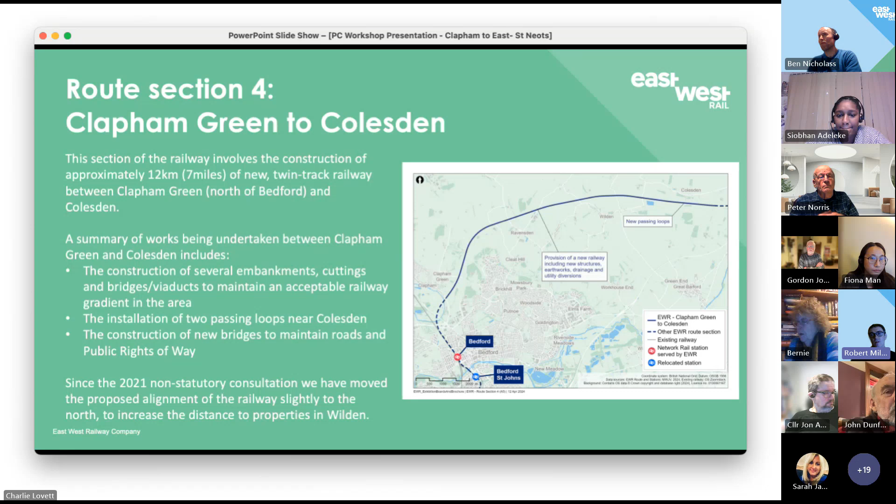So can we go to the next section, please, Sarah? Thanks. The next section we go into is Roxton to east of St Neots. In this section we are presenting 2 potential alignment options for the Tempsford alignment and the Tempsford station itself. There is alignment 1B, which deviates just after the Colesden area to go south of the Black Cat roundabout, crossing over the amended existing A421, the A1, River Great Ouse, East Coast Main Line, and back over to the new A421 dual carriageway. This alignment is quite similar to the route update announcement alignment we put forward in 2023.

An alternative to this has also been proposed at the consultation. We've been asking for views on both of these alignments. That's alignment 1C, which runs north of the Black Cat Junction. We cross over the A1 just north of the junction, River Great Ouse, and the East Coast Main Line.

Then we hug the north and west sides of the A421 through the area. The station designs at Tempsford are on a similar basis for both alignments, i.e. the East West Rail platforms are on viaducts above the East Coast Main Line, with a passenger interchange allowing people to access 2 platforms on the slow lines of the East Coast Main Line.

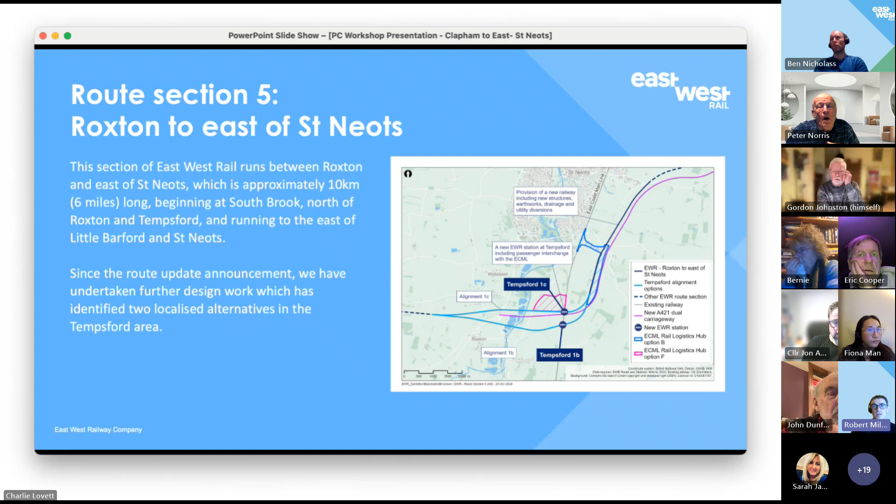We'll only be taking one of these options forward, and that's partially dependent on which alignment is chosen as preferred, as well as some further work that's underway. So we've expressed no preference between alignments 1B and 1C, and there's a question in the consultation document asking for people's views on those two.

Once we get just north of the existing A421, the routes are effectively the same as they head north along the eastern side of St Neots, and then we cross underneath Cambridge Road east of St Neots Wintringham Development before moving into the next section.

Much of this section east of St Neots is in cuttings as the hillside rises quite rapidly, though we are in short embankment and bridge sections to cross over Hen Brook and Foxbrook in that area.

I think probably the other point to note is alignment 1B is much higher than 1C. Alignment 1B at Tempsford Station itself is 22 metres above ground level, and 1C is 9 metres above ground level at that point, though it does need to be slightly higher to the west from there.

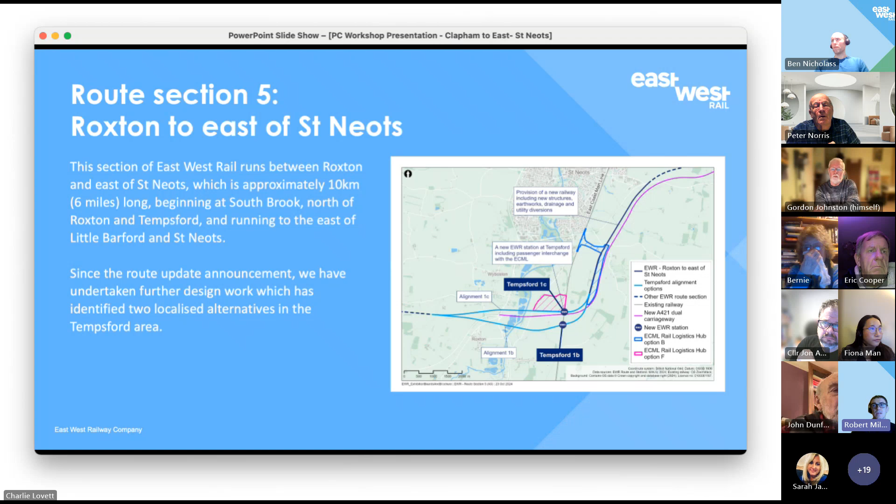I think that covers the area, Sarah. So, yeah, I'll pass to Fiona. Yeah, thanks. Yep, thanks, Rob.

I've got 2 slides on our approach to the environment on East West Rail, and then I'll talk a bit about our key environmental constraints and mitigation.

Protecting the environment is an important part of our decision making when we're developing our proposals. As part of the environmental mitigation hierarchy, we take a proactive approach to avoid, reduce or compensate for potential negative environmental impacts as a result of our scheme.

Since the 2021 non-statutory consultation, we have published our environmental sustainability strategy, which is available on our East West Rail website. This contains 6 environmental sustainability pillars, each with an associated ambition and definition. These pillars consist of natural environment, carbon, climate resilience, historic environment and landscape, circular economy, which is about minimizing waste and promoting material reuse, and finally, people and community.

Next slide, please, Charlie. Thank you.

As part of this non-statutory consultation, the likely environmental impacts of our proposals and the mitigations are described within our environmental update report. This report is available as a PDF and also as a digital interactive version on our website. For this section between Clapham Green and St Neots, you can find the information in chapters 8 and 9. As Siobhan mentioned earlier, our environmental mitigation proposals are in the plans and profile drawings, available on our website, and we also have some environmental fact sheets there too.

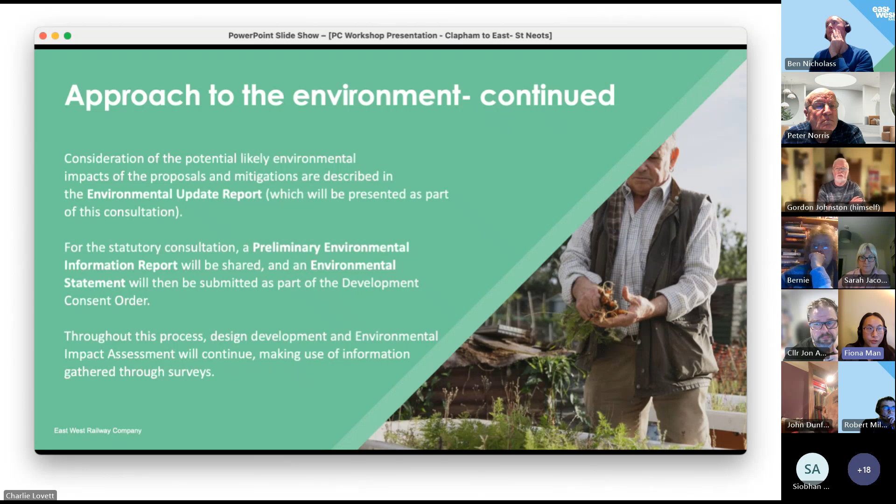Okay. Oh, sorry, Justin. Justin. You're on mute, Justin.

Just a quick one on the environmental impact assessment. No need to answer it now, but if you could answer it in the notes from this meeting. Could you just set out the headings of the 6 areas that you look at? And can you also set out the hierarchy that those areas are given in your assessment? Can you just outline them in the minutes from this meeting, and then what hierarchy they're given in terms of importance?

I can. So our scoping report is available publicly on the Planning Inspectorate's website. That will set out the topics we will cover within our environmental statement, so I can send that across to you. In terms of the hierarchy, I would need to get back to you on that one, but it would be a fine balance because obviously it's people, biodiversity - you have to balance those impacts.

I understand that. That's why I asked the question, and I didn't expect an answer to it tonight. But if we can have an answer in the minutes from the meeting, that'd be great. Thank you.

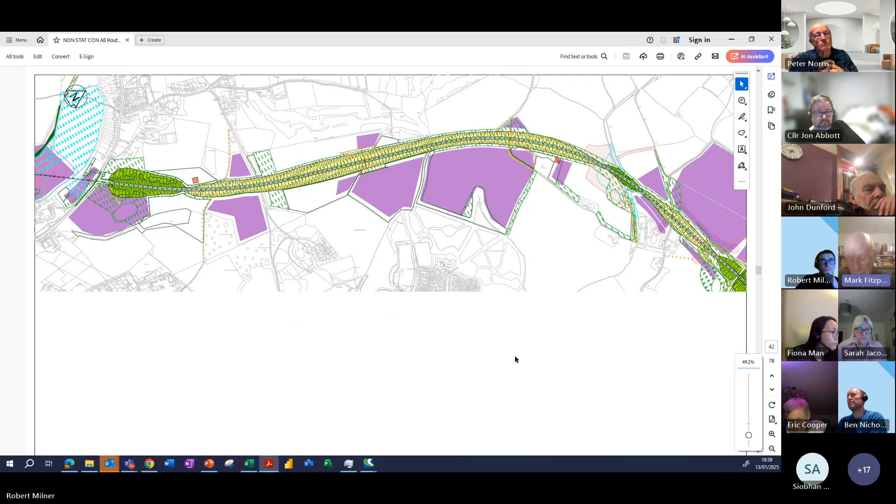I note that you're closing one footpath within Clapham, suggesting diverting via two other footpaths - Footpath Carriage Drive, Clapham 24 - we have suggested previously should be a bridleway. We've got two other bridleways, one in Clapham, one in Brickhill, that are within 400 metres of each other and don't connect. They would join around where you've got this proposed bridge, where Clapham footpaths 5 and 6 join. There's one bridleway on the Brickhill side, one on the Clapham side, 400 metres apart, but not connecting.

So we've got some historic weird things within the public rights of way network. It'd be amazingly good to try and improve on what we've got, to give the public a benefit from what is happening here. I'm fundamentally interested in what's the approach you're taking - is it simply to maintain, or is it to try and improve?

Thanks. I've just shared on screen the area you're referring to, where we have a number of footpaths and bridleways. I think step one has been to make sure that we maintain public rights of way as they are, with the requirements they have at the moment, but also to make sure they're designed to modern standards and requirements. As we move forward in the design, we would consider improvements, especially the quick-win type ones that we can deliver simply.

I think the challenge we might sometimes get on public rights of way is if we need to take additional land to add new public rights of way - that can sometimes be a challenge. We also get a sort of circular challenge where we'll get requests to improve a public right of way so it's suitable for horses and becomes a bridleway, and then a challenge back from cyclists and walkers who would prefer a path not shared with horses. So we need to consider that.

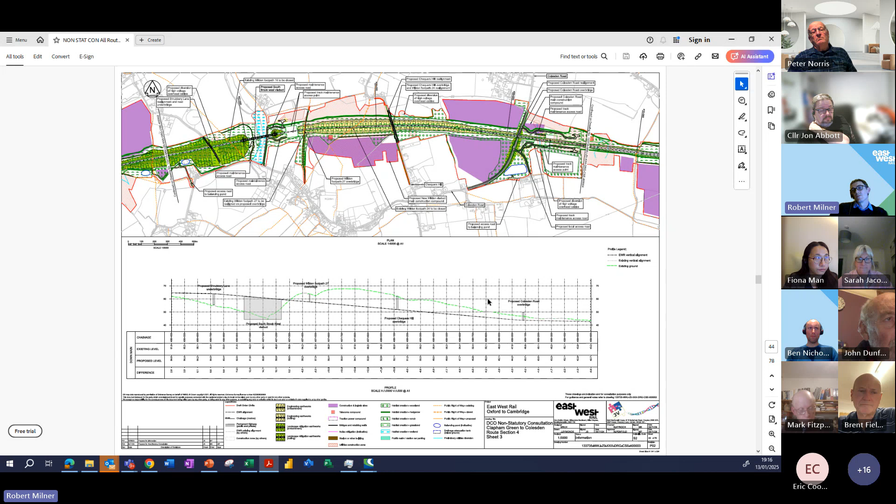When we're constructing the track, we'll be using very modern technology to lay that rail. I'm not a track engineer, but my understanding is that we'll be laying long lengths of rail, and we'll be particularly designing the railway to make sure it is low maintenance and low noise when trains are running across it. That's going to be constructed as part of the whole scheme. We'll do noise assessments across the scheme, and if there are areas breaching noise limits because of sound from the rail, that's something we'd look to see whether damping systems could be used.

This goes back to the point about the cut and cover tunnel before. Looking at Wilden, there are large areas that are on embankment and then viaduct, so you're effectively asking, can we have a cut and cover tunnel through Chapel Hill? I don't think that would significantly alter the amount of construction there, maybe more, because we'd be bringing a lot of concrete in. At the moment we're excavating and removing soil; for the cut and cover tunnel we'd still have to remove quite a lot of soil, and build a large concrete box in that area. That cut and cover tunnel would be a significant amount of construction by Wilden, for a significant additional cost compared to the benefits it would bring. So I think we'd struggle to make a case for the additional investment for a cut and cover tunnel in that area.

And yet we are, probably, definitely the worst affected village. But do you want to visit some of the others? I've been told that by about four villages so far. Well, the villages near Cambridge are saying a similar thing.

This is almost a point where it goes above where we sit on the project and becomes a question for DFT, whether they're prepared to spend extra tens, maybe £100 million, for the benefit versus the cost there. But I'm not quite sure all your problems would be solved by a cut and cover tunnel through Wilden. I think my parishioners would be happy.

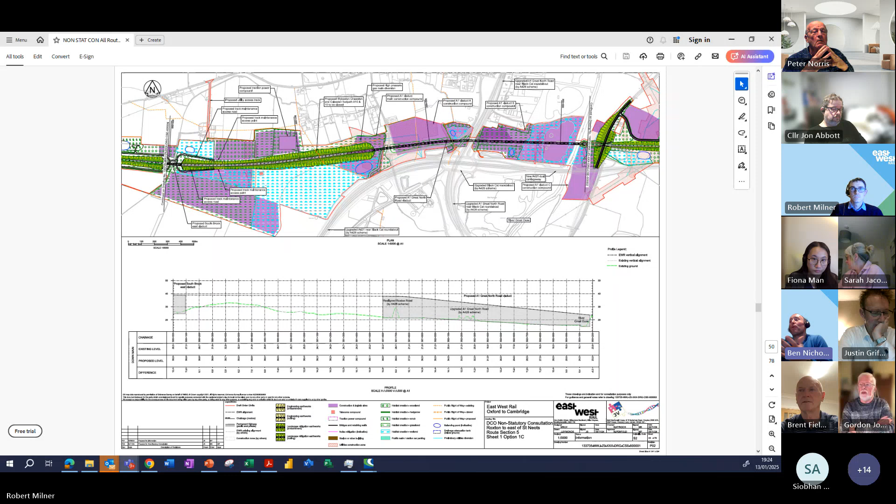So the modelling, Evie—I can see what you're saying, and I'm laughing because modelling is mathematically perfect. But this is the point of these consultations: it's to get the real world for you to really challenge us and say, actually, there are people here, and we've got a unique set of circumstances—or not even unique, but circumstances that may not be picked up within your modelling. Can you consider them? This is what our thoughts are. So if you could feed those back, I'd really, truly appreciate it.

Thank you. With our parish, we don't have a bus service at all, and if you don't have a car, you're stuffed, and you can't afford a taxi. So the only way to get anywhere is to get in a car and drive. So you've got to take that into your modelling. Anyway, I'll let somebody else have a go now.

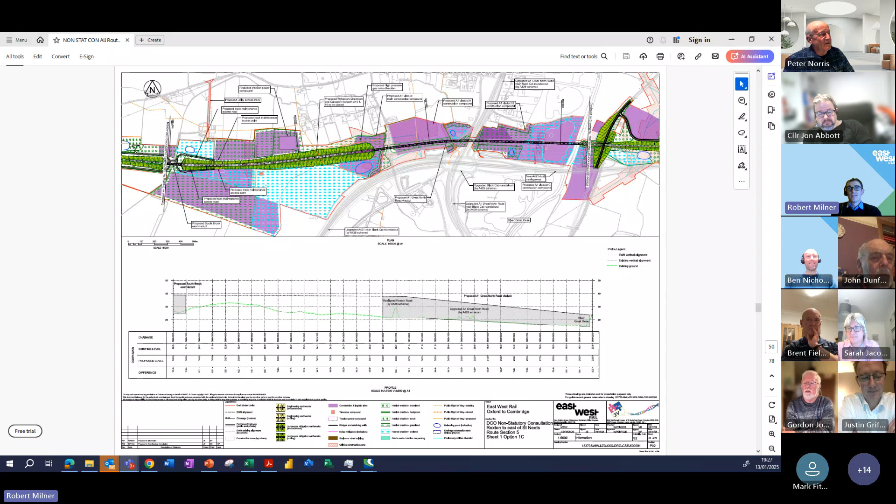British Horse Society—we are having discussions with the British Horse Society, and we do design with the required standards in mind there. So it would be more a case that we would design to the standard, then carry out first assessments on that and consult with them.

Ben, I think we discussed a similar point earlier, didn't we? The guidance includes the assessment of horse riding needs, doesn't it? So that's something we will be doing, though it hasn't been done to date, but the designs to date are to that guidance. We have the A428 improvement project model, so we have all the detail of that. So if it's not shown on the drawing, I still believe we have the paths and will have taken account of those—but I need to check that point, if somebody can make a note.

I think your next point was on the design of the viaduct—I feel I may have missed a point there. Yeah, you missed a few, but go on. Okay, I'll get what I can, and then you can catch me at the end.

The designs of the viaduct are very much work in progress at the moment. We've just taken a very standard design with piers every 20 meters along the route. How they are designed, even in terms of whether they're steel or concrete, is something that's part of the development as we go forward. I think we'll be specifying enough about the design to do a reasonably conservative environmental impact assessment and traffic and transport assessment, and to make sure we've got space for things like concrete batching if required.

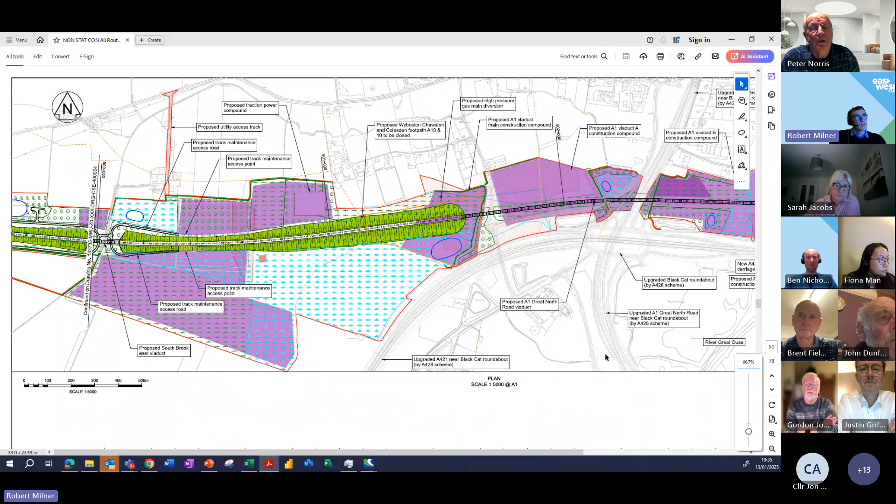Yeah, so that's on these plan and profiles. The grey, I'm going to show on the screen, is the viaduct. So the embankment to viaduct transition here - you've got 15.8 meters at that point. Okay, that's great.

And then last but not least, acoustic barriers. What assumptions are made of acoustic barriers for 1B and 1C?

I don't believe we've assumed acoustic barriers. We'll do noise modelling and do the assessments, looking at close by receptors there. For the core route, we haven't been assuming that noise barriers would be required. I think the only places we've shown noise barriers are where we're very, very close - there's a couple shown in the Cambridge area, where we're very close to existing housing, but we haven't assumed at this stage that we would be installing barriers, or shown them on the plans. It's something that when the assessment is carried out, they would be introduced. So we go from a point of only introducing them when we've got confidence they'd be needed - it'd be quite misleading to show them now then withdraw them.

Fiona, I'm not sure if you're closer to this work. Yeah, I think you're right - our modelling and assessment work is still ongoing, so we still need to determine where those locations would be. We're still undertaking baseline surveys to understand existing conditions, and then we need to predict as part of our modelling work what those will likely be when our scheme is in place. In the first instance, we'd look at embedded mitigation, such as deep cuttings, which act as a form of noise attenuation, and then if needed, we would look at noise barriers that could be reflective or absorptive. So we haven't decided what that would look like yet until we've completed our assessment work.

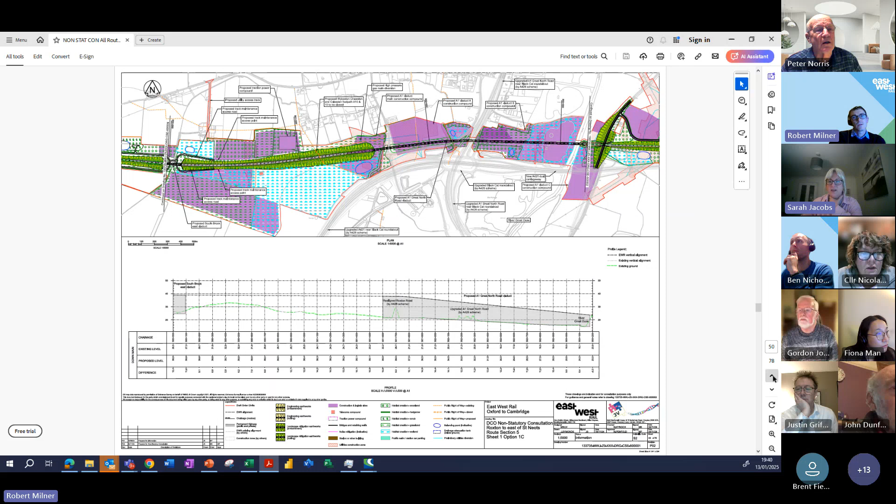Hello, everyone. Not too technical. Could you please go back to the previous maps? We can't hear you very well. Can you turn your sound up? That was better. Yeah, we can hear you now.

Can we go to Wilden High Street, please? No, the first one before that one. Yep, got you.

Wilden. Now, I'm just puzzled. It appears to be a finger of land that is on a public footpath between two. That's the one. What is that, please?

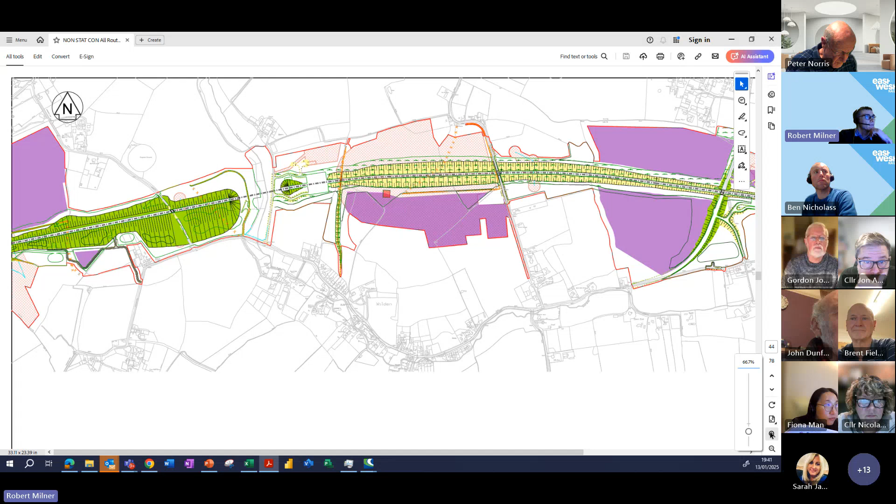That is where we are constructing the bridge over the railway, and then we've got slopes down from the bridge to connect into that footpath. So this bit is in the fields on the footpath, just tying ourselves in back to the footpath. The existing footpath's the dashed lines here, and we pick it up at this point, and then raise the level slightly to go up to cross over the cutting in this area.

Okay, that's fine. That's cleared it up actually. I was sort of slightly puzzled. I've been puzzled for a few weeks when I saw it.

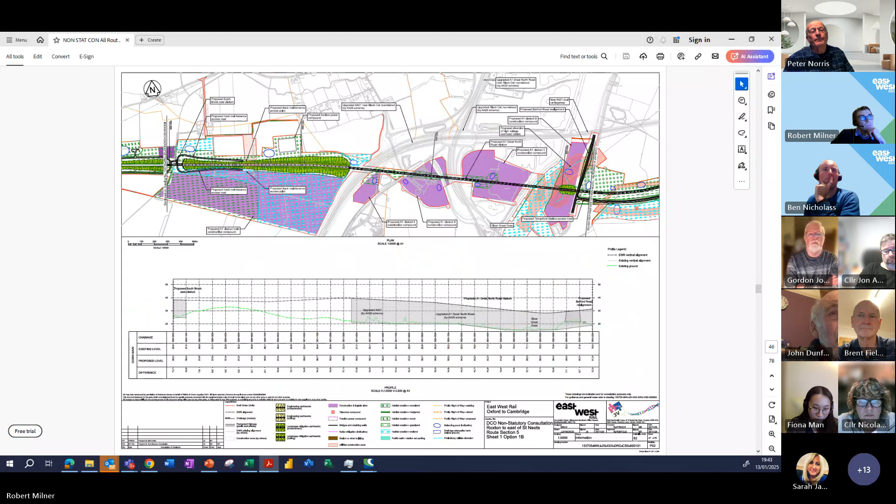We've got some where we've got potential direct impacts, or where we're very close to the properties in the next section after we go through Tempsford and alongside St Neots, so we've spoken to the landowners there. But in the sections, the only one where we've said we would need to demolish a property is route section 6, Two Pots Farm, where we are clashing directly with them as we tunnel underneath the A428. We spoke about the garden centre, so on option 1B, we clash directly with the property with a construction site there, so for intents and purposes, we would need to demolish that property.

And then just on this section past St Neots, there are ones where we go very close to some existing properties, and we've been speaking to them - it's quite complex where we go near the property, especially with the logistics hub for this option. We're speaking to them about how we can avoid clashing with the property while maintaining access, i.e. the road access and their individual access. But we don't necessarily need to demolish the property to construct the scheme, we don't believe. Okay, thank you.

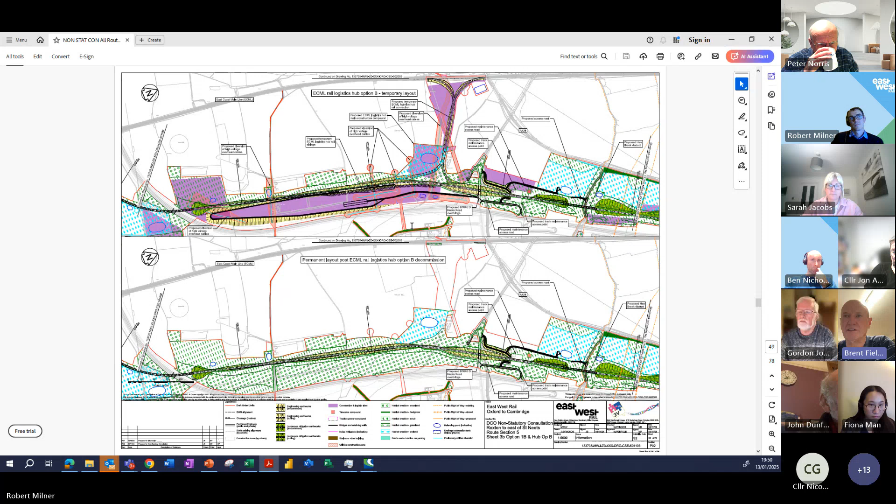At the Wilden Village Hall presentation, I was told that throughout the full length of the Wilden cutting, there would be full overhead electrification. Is that still the case?

That's my first point. My second point is the previous point that Nikki raised about that finger of land where you're going to put the footbridge over the top for walkers to get over there. There's a persistent rumour going around Wilden that I can't seem to damp down, that the houses where that finger of land goes down to on the high street, there's going to be demolitions there. Can you just confirm for me that that's not the case?

Okay, I'll take the second point first. I'm not sure where that rumour's come from - no, me neither. I mean, we are not even taking land there. We're just picking a footpath up at the back of their garden in the fields. So no, I don't know where that rumour has come from. I don't know whether there's some confusion with previous alignments or something.

I think we were quite clear in the non-statutory consultation on electrification. Our preference is for discontinuous electrification. We're looking at various options at the moment. One of those would be full electrification, but the expectation is that discontinuous electrification is more likely, where trains run on overhead wires for the majority of the route, with the ability to use batteries on those parts of the line without overhead wires. For this part of the route, because it's new build railway, the expectation would be that it runs on overhead wires through this section, but that piece of work isn't finished yet, so we don't have a definitive conclusion of where on the route there would be overhead wires and not. This section of route has always been designed with enough space for overhead wires.

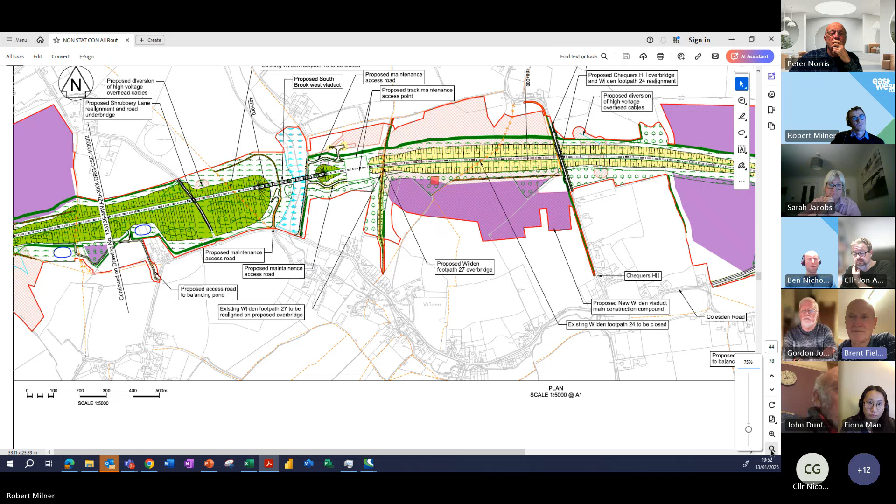Who's next? Nikki, sorry. Yeah, hi, thank you. Just going back to Peter's point about wildlife corridors. I understand bats fly, and you can have culverts for otters and whatever else lives in the water. What about large land species such as badgers? We have several species of deer, fox, hares - their range is going to be cut severely by a double fence. What happens there? We need to complete our ecology surveys at the moment, understand where they are, understand their range paths, and then implement suitable mitigation. We need to work closely with Natural England on our protected species licensing to make sure we're implementing the most appropriate mitigation so we don't impact them during construction and operation. That's still an ongoing exercise, but we do consider badgers.

What mitigation would that be? If they've got a fence, they can't climb over it or come through it, can they? No, we'd have to either relocate the sett itself or provide them with suitable access to it. But mostly, if it's cut off, it's most likely we'll have to relocate the sett itself.

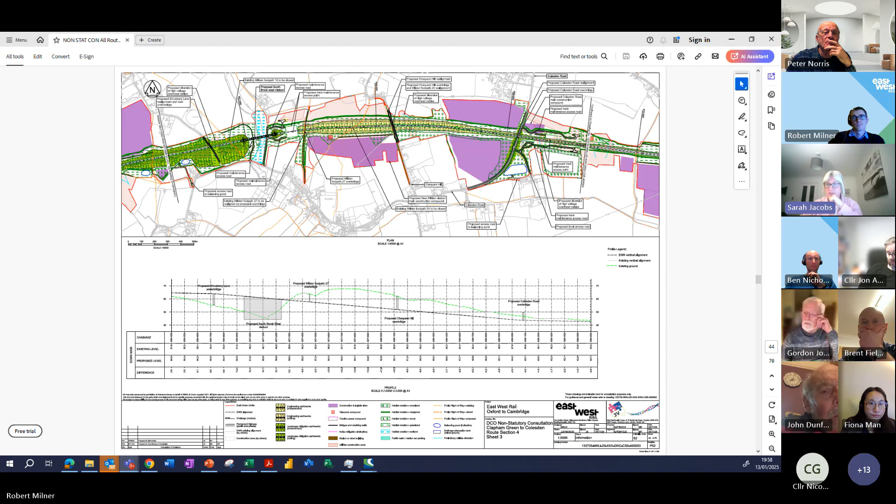Looks like we have. Yeah, hello, can you hear me, John? John Dunford, can you hear me? Yeah, I did put my hand up a few times as we went through various things, but for some reason I seem to get missed. Oh, sorry John, town councillor in St Neots.

There seems to be a little bit of confusion about what the A421 and the A428 are. Currently, the 421 goes to Black Cat, and the 428 starts from the A1 going towards Cambridge. Quite how that will change when the new bit of road from Black Cat is built, I don't know, but I suspect it might change from 421 to Black Cat and then 428 from Black Cat. That's a small point for you to think about with your negotiations.

As for electrification, discontinuous electrification, I think the East-West group really need to seriously think about that, because at the end of the day, if you've got discontinuous electrification, that's not going to benefit freight trains. Although there are locomotives coming along with diesel, electric and battery power, that battery and diesel power is only for short distances, which means East-West will quite likely predominantly be getting diesel locomotives dragging freight trains.